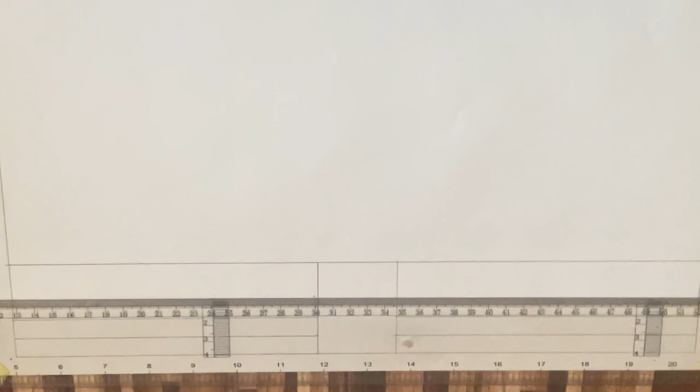Now in continuation with the title block, you can now put all your lines that you are going to be writing your names, your scale and everything on. So see this, this, you're going to make sure it's set with the ruler, with the board, and also with the paper.

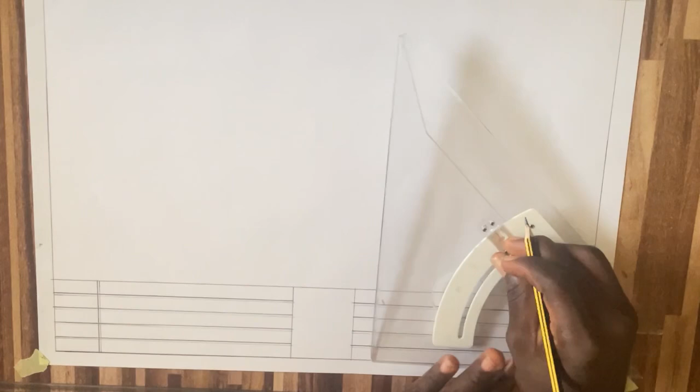And then you can bring your adjustable set square, draw a line here, do a small line that will not be as thick as the first one, just to make it look more aesthetic, and very beautiful. Same thing goes for this place. The first line thick, and the second one will look thin, not as thick as the first one.

Then you can start your drawings. Firstly, draw the straight line. Okay. Draw another straight line here. Take your adjustable set square, draw a straight line.

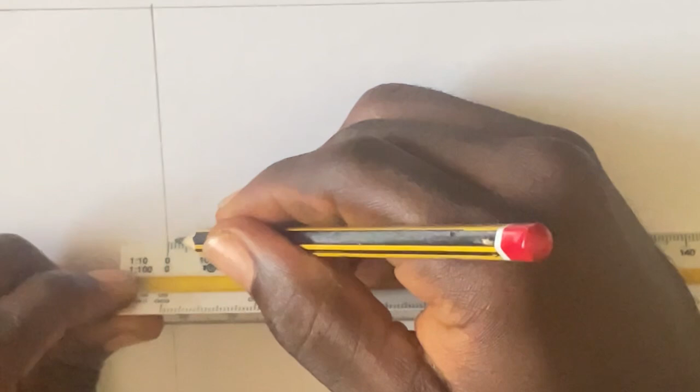We are using a scale of 1:100. Scale of 1:100, meaning 1 unit on this paper means 100 units on the ground. So this is the scale, and now place your scale rule on the lines you have marked. When you place it on the line you have marked, you count. This is 1 and this is 2. At the center of 2 and 3, you mark it, and that is the 225. We call it 225 because it's the standard measurement of the block.

So once you've marked it, you can take your adjustable set square and then draw a straight line, a thin line. It should be a thin line, but because I want you to see it clearly, that is the reason why I'm making it thick now. So once you've drawn the line, you can take your scale rule and mark these edges again. Take out another 225. 1, 2, and 225 here, the center of 2 and 3. Once you mark it, you can take your T-square, set it to where you've marked, and then draw your straight line.

Now I said we are doing a 2-bedroom flat, right? So first of all, we are going to measure the bedroom. In measuring the bedroom, you're going to place your ruler in the scale of 1:100. I'm going to mark out 3.6, that is 3,600. I'm going to mark it out. When you've marked it out, then you can mark your 225 beneath the 3.6 you marked earlier, and then you can take your ruler and draw a straight line.

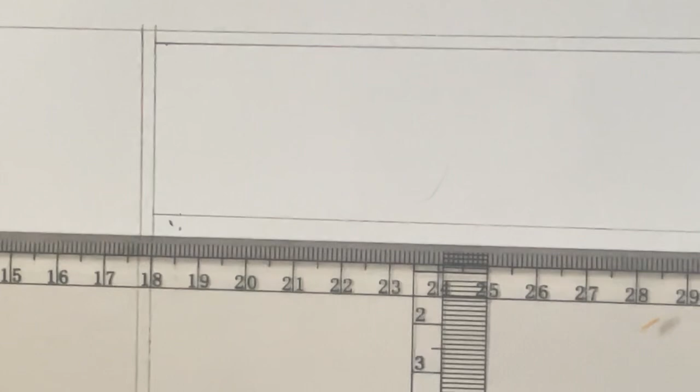Once you have marked your 3.6 and your 225, you can mark your toilet below. The standard measurement for the toilet around this place is about 1.5. 1.5 is okay on the scale of 1:100, and then mark your 225 below it. Then you will draw your line again. Then beneath the toilet, you are marking another 225 for the second toilet. 1.5 and 225 again. Then mark your line. Make sure that your line is straight.

And then you can now mark your 3.6 for another bedroom, the second bedroom that will utilize this toilet over here. Make sure you set your scale rule with your markings, and draw a straight line again.

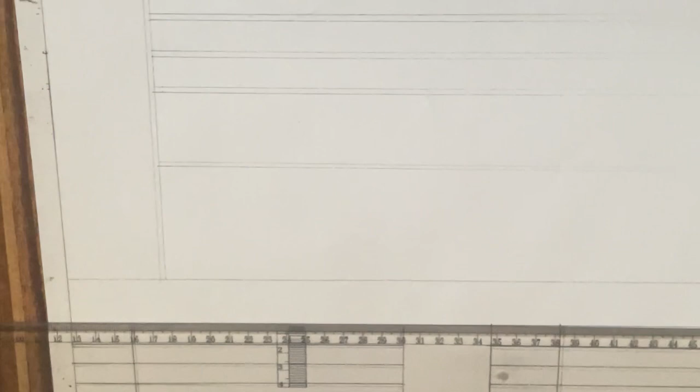Now you can take your scale and give it another 3.6 up here. That means the length and the breadth is 3.6 for the building. Then you mark your 225 again. Take your adjustable set square. Your adjustable set square is for the vertical lines, while your T-square is for the horizontal lines. So you mark it and you mark your 225. Make sure you get down here because you are going to be needing it on this side too.

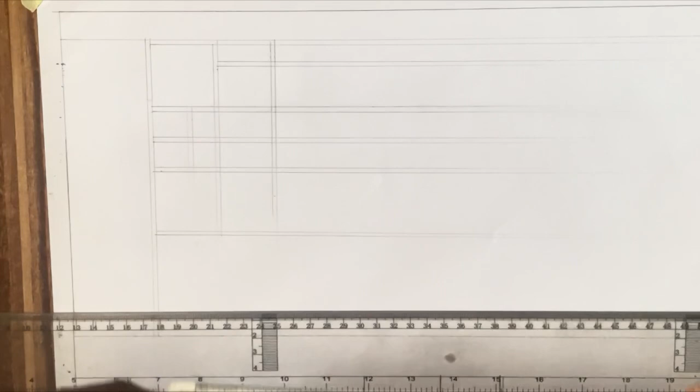And then you can take your ruler and mark in 2 meters here. 2 meters, and mark your 225. And then the toilet will now be done. Now place your ruler to make sure that you mark the kitchen. The kitchen, you can give it about 2.7 meters, and this is 2.7 meters. This is 2.5, this 2.6, and this is 2.7. So you mark your 225 that represents the block.

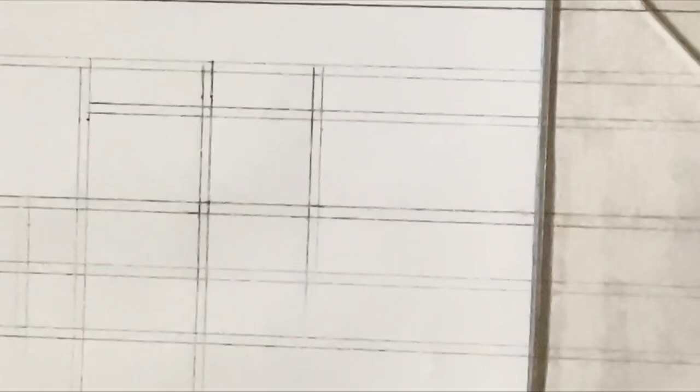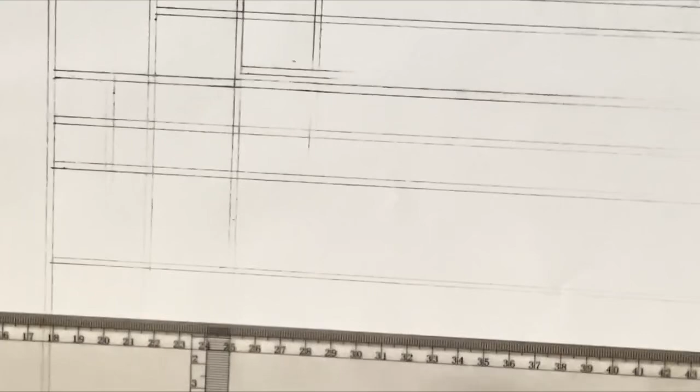And now you can place your adjustable set square and mark it out. Once you have marked your kitchen with the 2.7, you can now make the length 3 meters. Mark the length 3 meters in here too. Mark it. Use your ruler. Do it 3 meters like this. Then mark your store. Give your store at least 1.2 meters. 1.2 meters. That's all. Mark it.

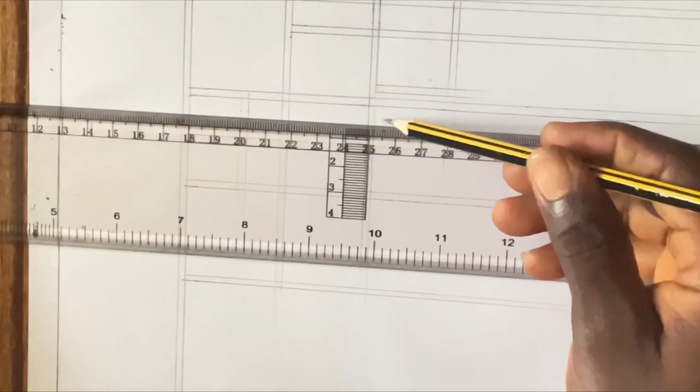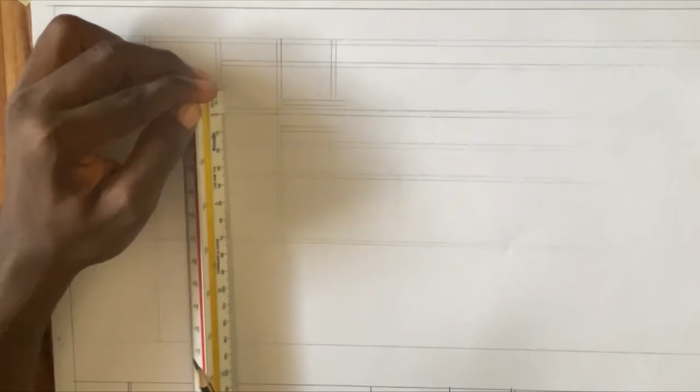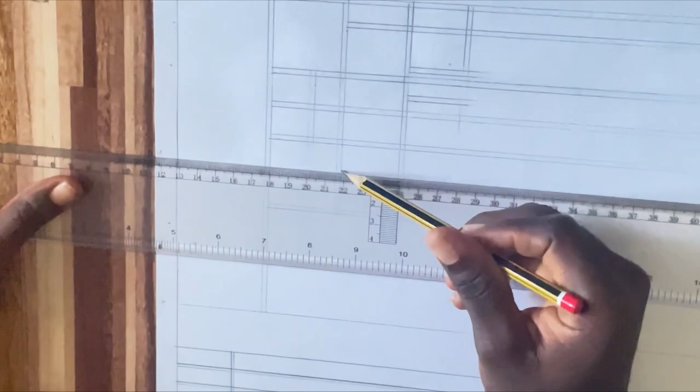Now, since you're done with that, you can check. Once you've checked, you can place your ruler here beneath the dining and check the measurement of your living room. It should be at least 5 meters, and place your 225 here and check for the breadth, and that should be 3.1 meters. It's okay, you can do any sizes you want. Place your T-square and mark it out. Make sure your T-square is straight.

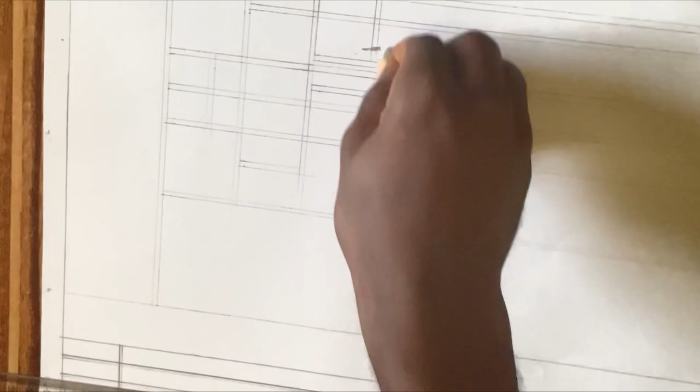Once you're done with that, you can take your cleaner and clean the lines that are not supposed to be there, or that make it look unreal. As you can see now, we have already cleaned all the lines that are not necessary. It is starting to look like a plan now, but there are still some features we have to bring out. Now we can start bringing out the windows.

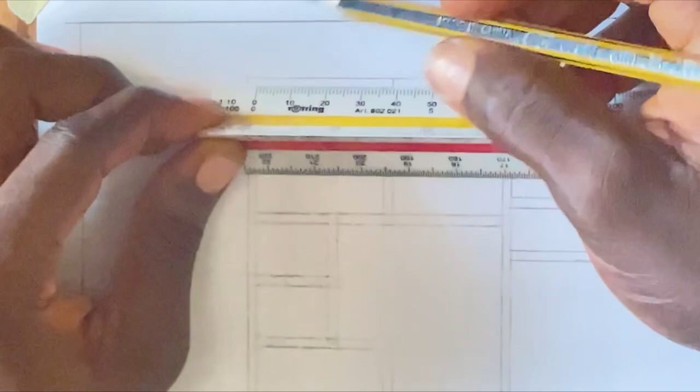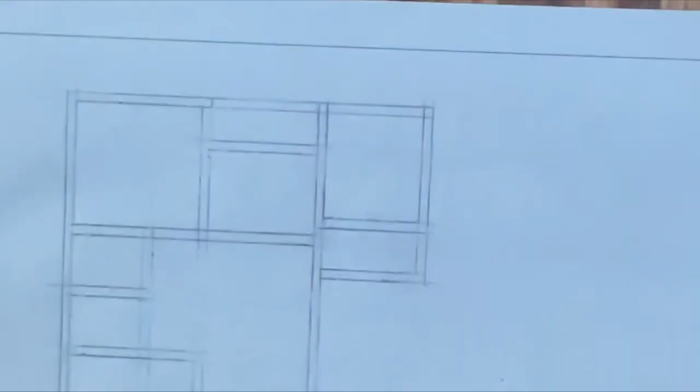Now this is 3.6, as we have marked. The breadth is 3.6. Now you want to bring out a window. Your window should not be more than 1.2, and 3.6 divided by 3 will give you 1.2. So when you mark 1.2 here, and also mark another 1.2, you have showcased your window, and it falls in the center. This is 1.2, and this place is also 1.2. So it falls to center like that. You can now place your adjustable set square and mark it up here, and also mark it down here, because the same window works for both bedrooms, since they are situated along the same side.

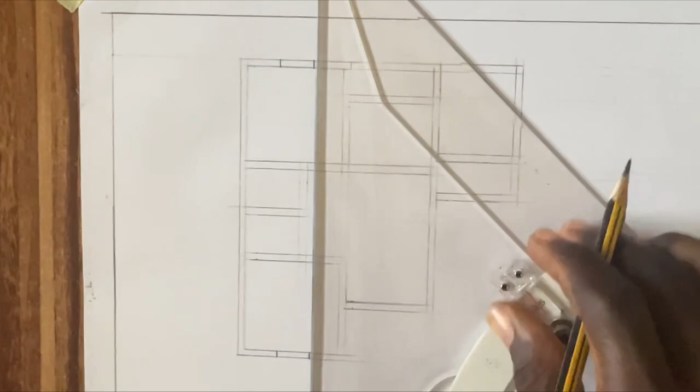You can bring out a window for these toilets, and their window should not be more than 600. So you mark it down here, place your ruler here too, and mark 600 here too. Place your T-square, marking those horizontal lines like this.

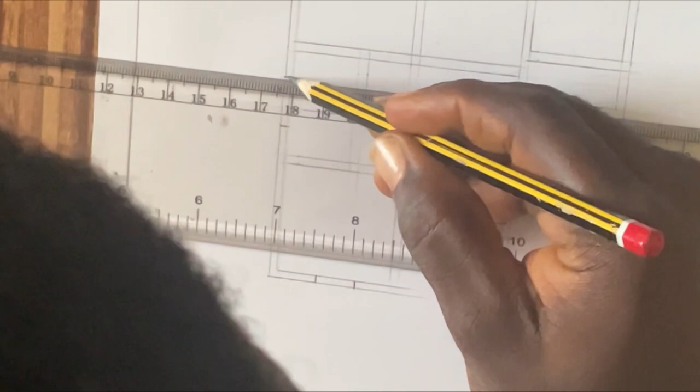Now you can also indicate the window for the dining. This dining is 3 meters. I want to bring out a window of about 1.2 also. So divide the 3 meters into 2. It will give you 1.5, right? Mark that center of 1.5, meaning this place is 1.5 and this place is 1.5. Then mark 600 to this side, place your scale rule to the center again and mark 600 to this side. 600 plus 600 will give you 1.2. Then mark your window out here too. That's good.

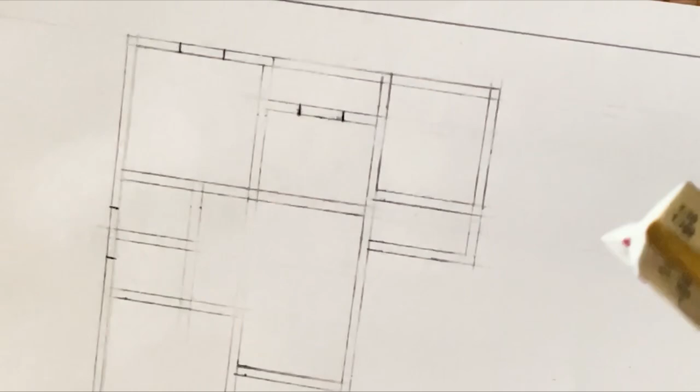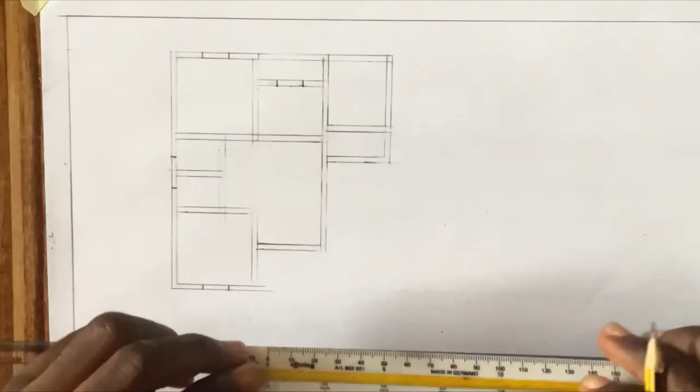For the kitchen now, the window should not be more than 1.2. This is 2.7, and you want to mark a window of about 1.2 that falls to the center. Divide 2.7 by 2, and it will give you 1.35. Locate 1.35 here. Mark the center. Then mark your 600 here as you marked the former one. Mark your 600 here too. Good. Then take your adjustable set square and mark the lines out. Good.

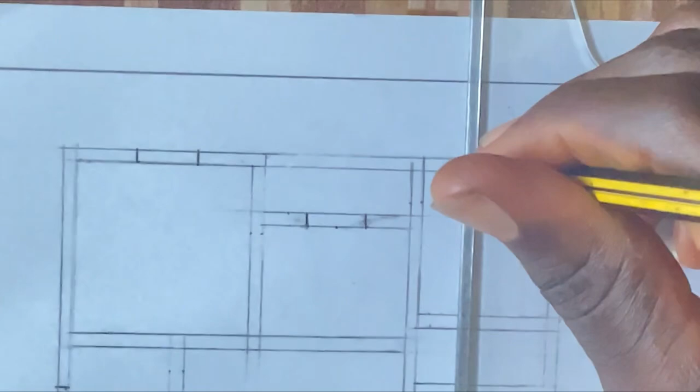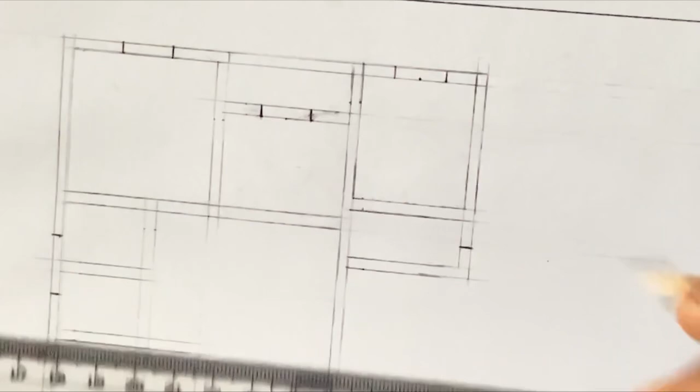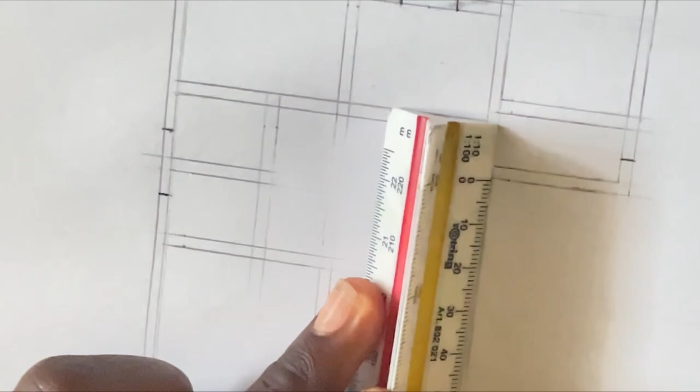Then you can come back to the store here, and the store window should also not be more than 600. Give it 600, and mark it out like this. Now coming to the living room, as you can see, from the store to this place is nothing less than 4 meters. So you can easily locate the center to be 2. Since it is 2, you can mark your 600 to this side and also 600 to this side, and mark out your windows.

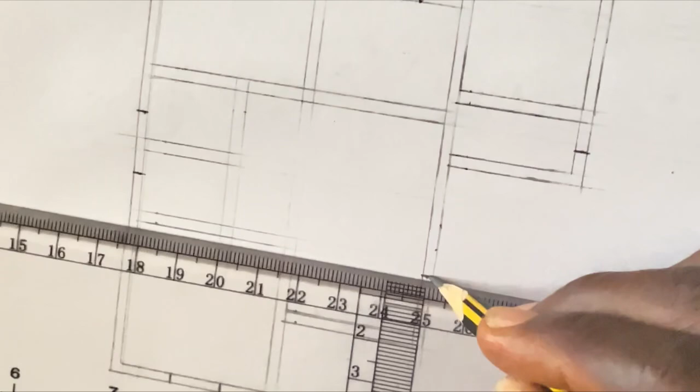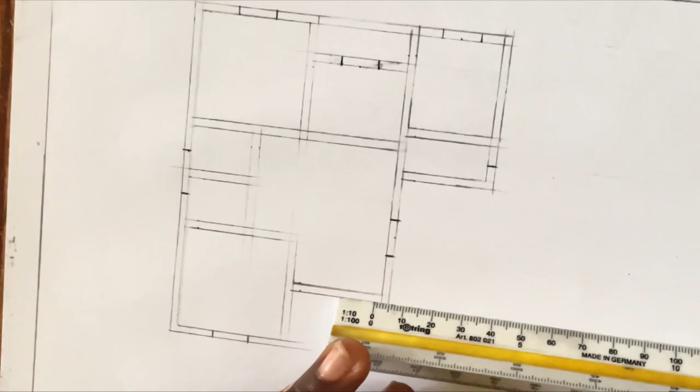And then coming down to this place, it is a living room. It should have at least 2 windows. So you can showcase another window here. Once you've given this space about 2 meters, you can easily show your 1.2 window. Now take your adjustable set square and mark it out.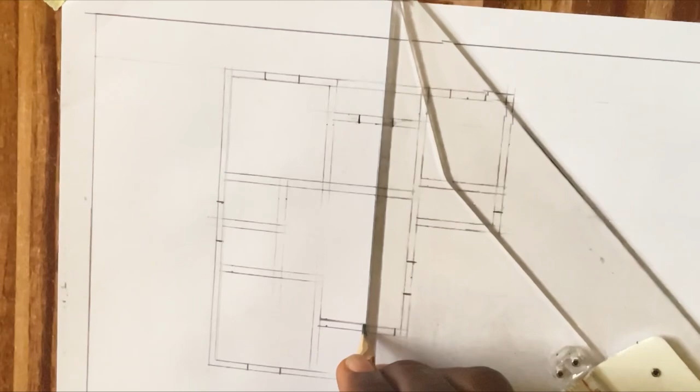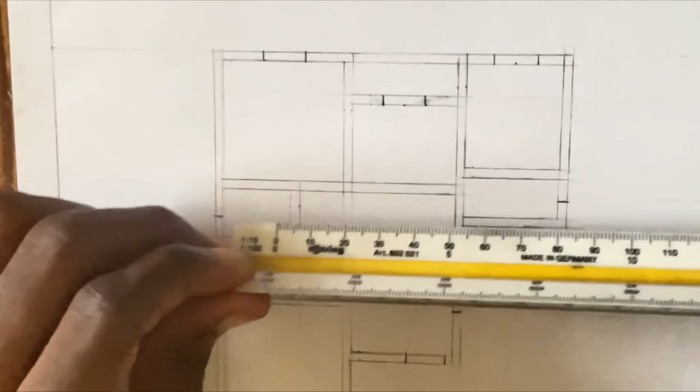Adjust this place. Now, since you have marked out all the windows, you can now start marking out the what? The doors. You can now start marking out the doors. Coming down to this place, you can give it no less than 900. The door should be 900 for the bedroom. This place too is 900, though both of them will correspond with each other. So when you mark this out, you can mark this out.

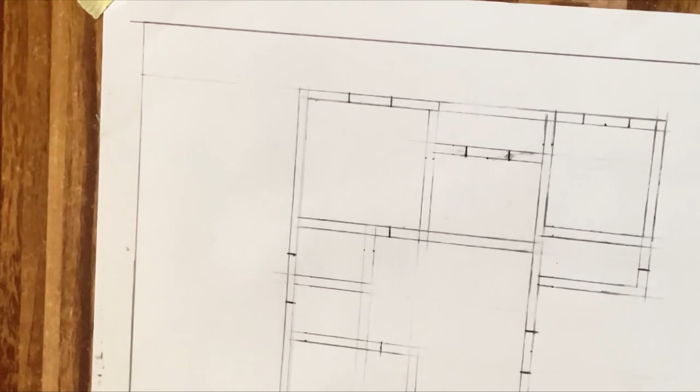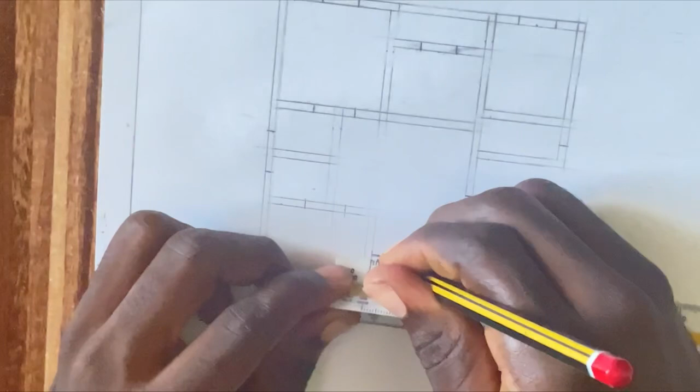Now you can also make your doors for the toilet to not be more than 750. Yeah, take the adjustable set square, show the lines of your doors, mark out your door for the living room. First of all, make your door for the living room to be 1.2, because it has to be wide. It is the main entrance of the building, so it has to be wide. So you can showcase it like this, and something like this. It's okay.

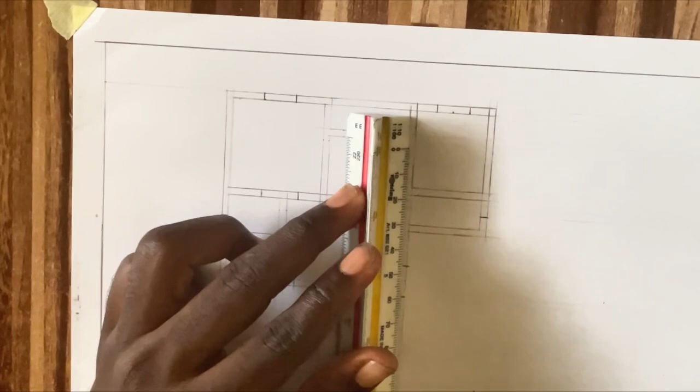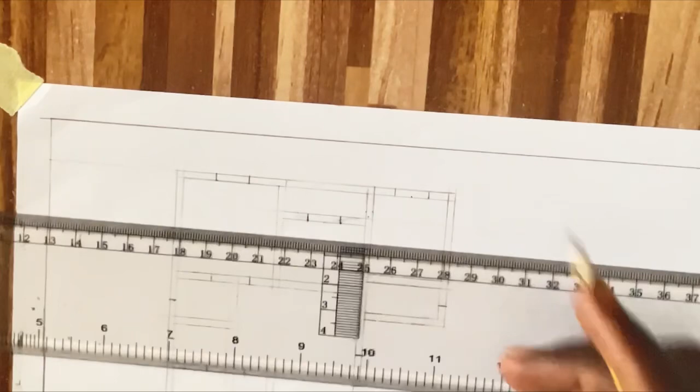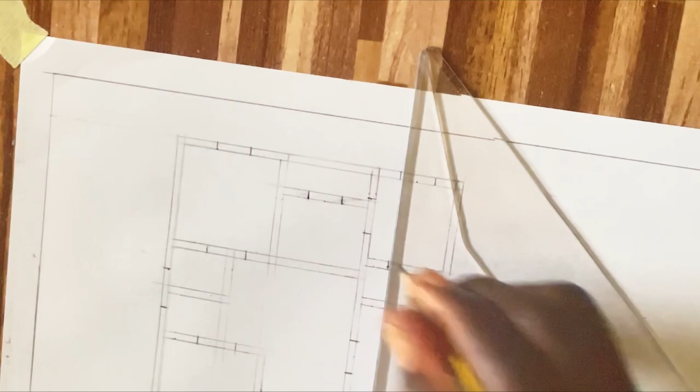And then you can mark your doors of dining room to the kitchen to be also 900. Mark it 900 like this. Also mark the exit, the kitchen exit, and give it 900. This is it. Yeah. And your doors for the store, it is the kitchen that you pass through to enter the store. You can give it a 750. Mark it. Now you're done with the doors.

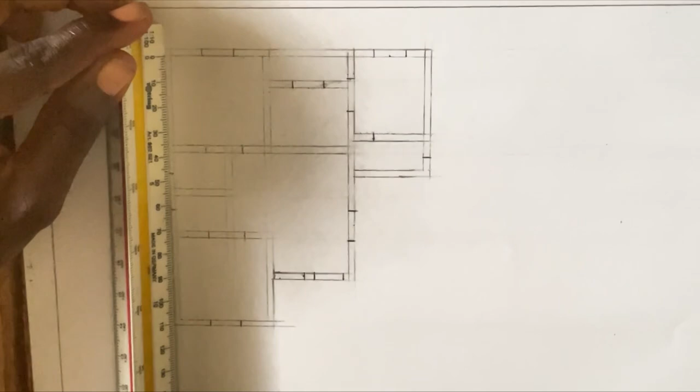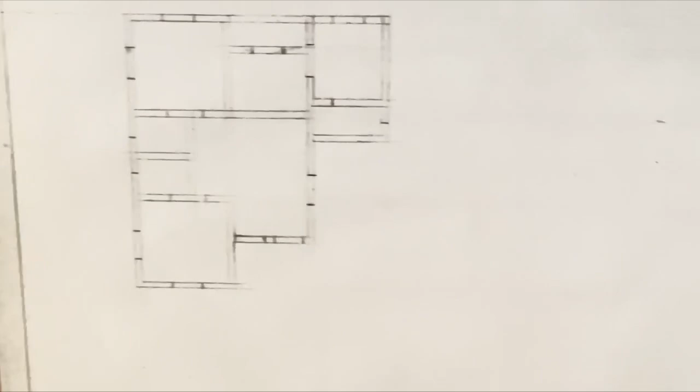Now look at your bedrooms. You see that there is window here, there is window here, but the bedrooms need ventilation. There should be enough ventilation coming into the bedroom. So you can now come down to this place and mark another 1.2 here, 1.2, mark another 1.2 here, another 1.2 here, and another 1.2 here, and then mark it out as what? As a window. Yeah. Now your window is complete. Now you can start taking it out to make sure that it is taken out very well. You got your windows.

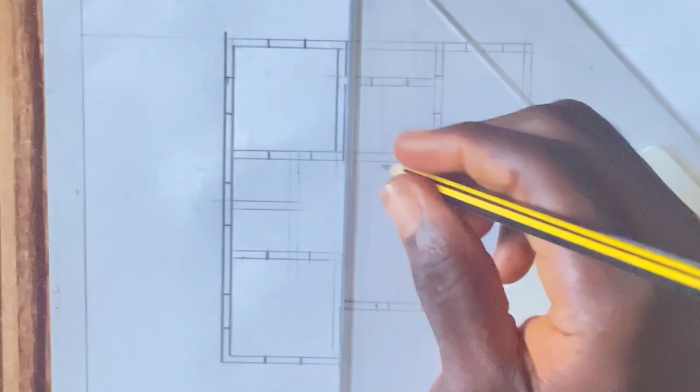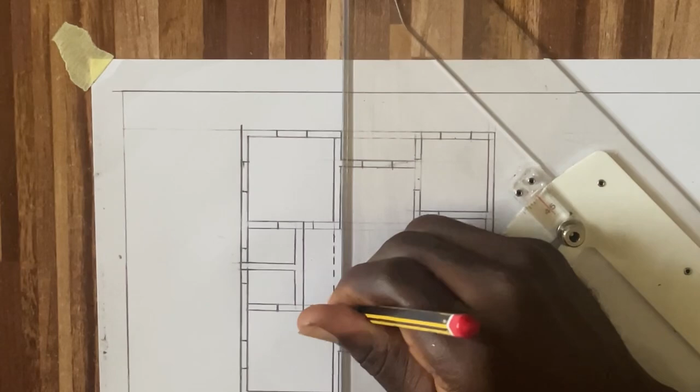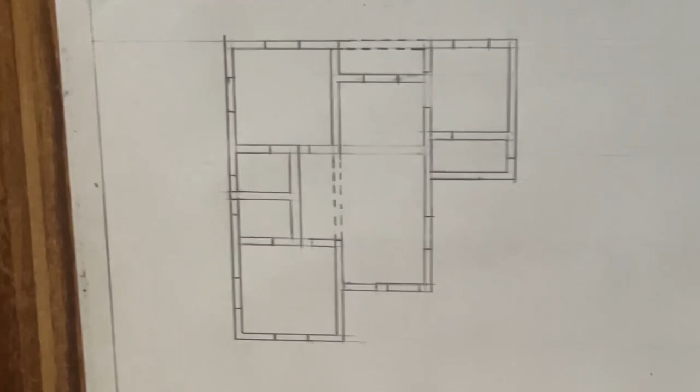Now, since you have marked it out, you can now indicate your arch. Arch is shown by a broken line. Okay. This side, there will be an arch showcasing that there is no door there, but an arch. Likewise, this exit, you can showcase an arch here too, showcasing that it will not be a door, it's just an exit outside of the building. And also to the dining area, you can show the arch too. This, something like this. It's okay.

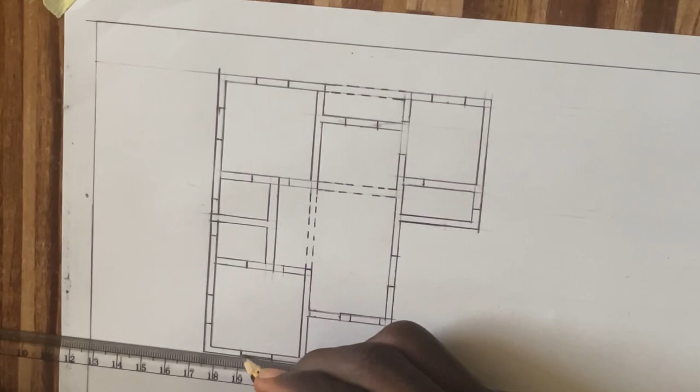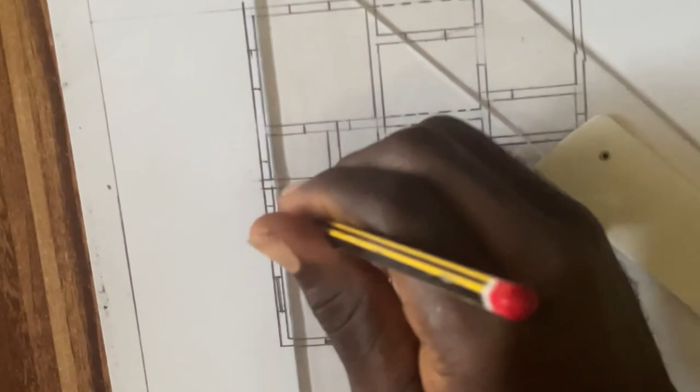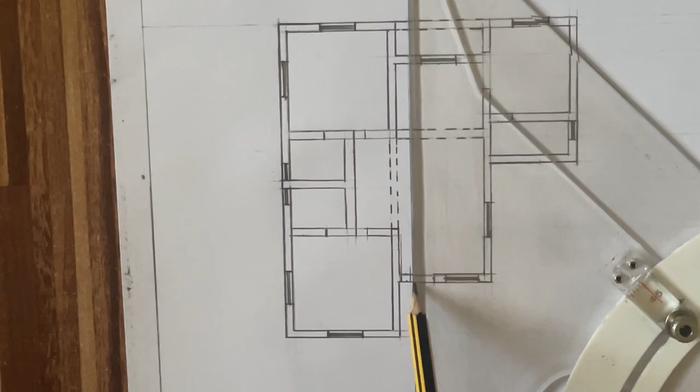Then now you can start hatching your windows. You can hatch it in any form you like. Just make sure that it showcases that yes, it is a window that is there. Like that. You can hatch it like this. Hatch it like this. Now we are done hatching the windows. You can now start hatching your doors. Remember, if you want to do yours, make it neat and very good. This is your rough work, so you can make yours very neat.

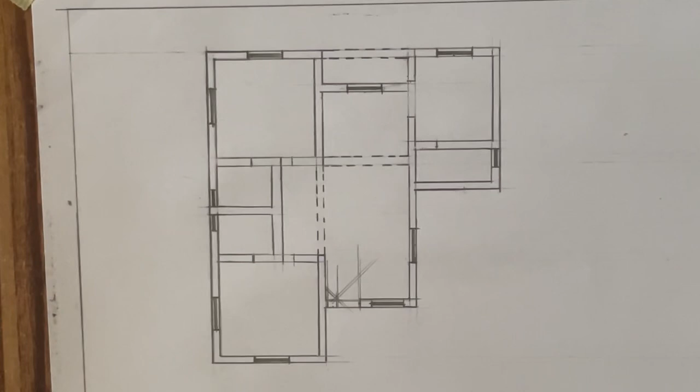Arc your door like this, showcasing that this door is a door that is wide, the main entrance of the building. You can arc your own doors in different ways. So there's a door here. Yes, you can arc this door.

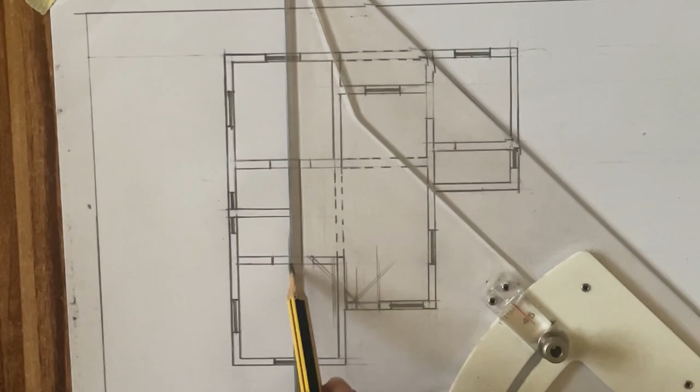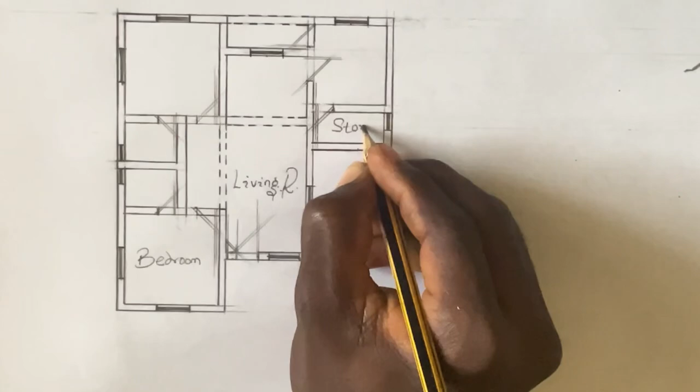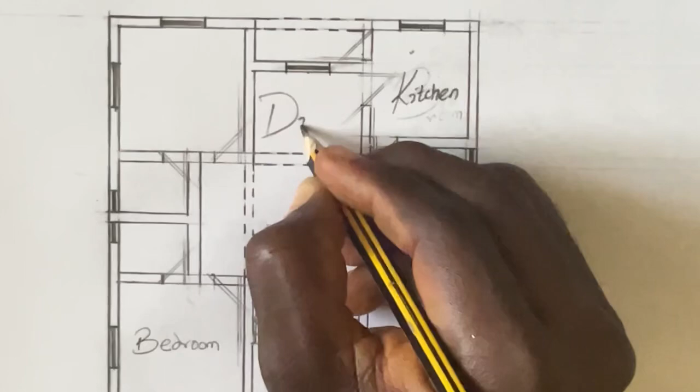Now, once you're done arcing the doors, door here, door here, door here, you're going to start with indication of writing of the rooms. This is bedroom. This is living room. This is a store. This is a bedroom. Sorry, this is kitchen. Kitchen. This is dining. And this is also bedroom. This is an exit. This area is lobby. This is toilet. This is also toilet.

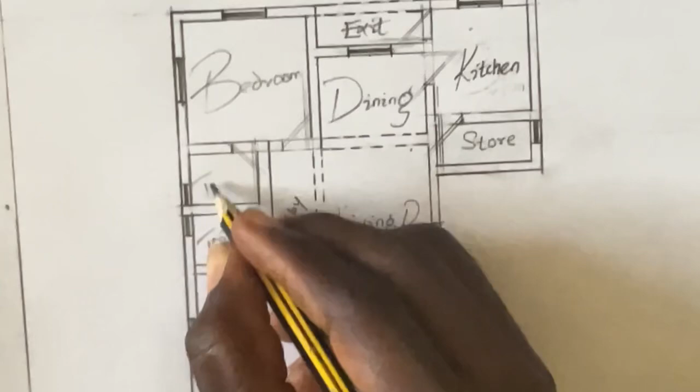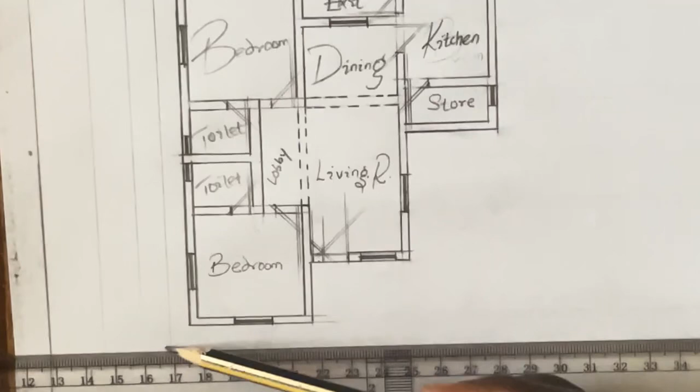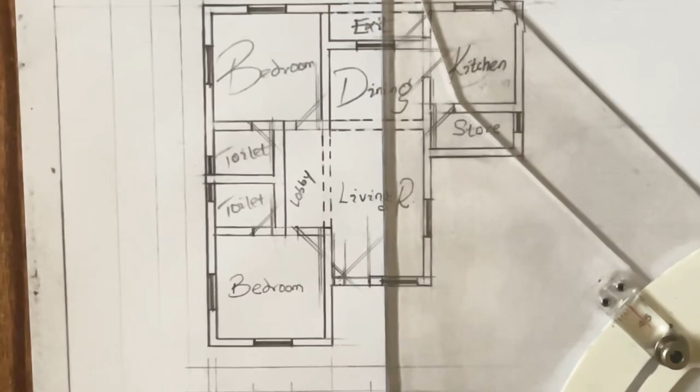Once you're done with the writing of the names, you can now show your dimension line. Show your dimension line here. You can show your dimension lines here. Now, show like this. Show your dimension lines. Show a dimension line here too.

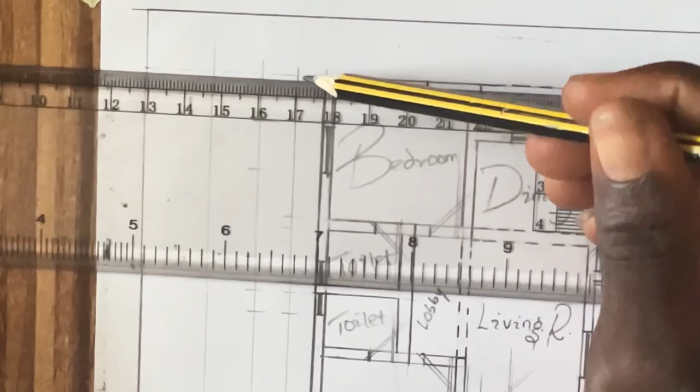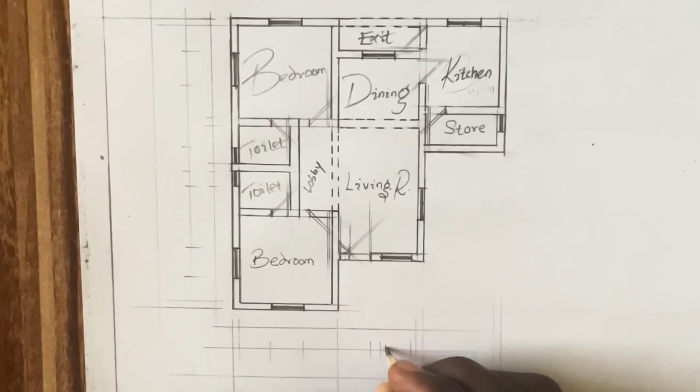Now, you change the dimension line. You can also decide to show it this side too, this side, this side, and this side. But I would only want to show it on these two sides, this side and this side. So, this side too. It's okay. Then you can start writing your measurement. This is size of window, so this is 1.2 meter. This is also window, 1.2 meter. This is 225, the size of the block. This is also 225.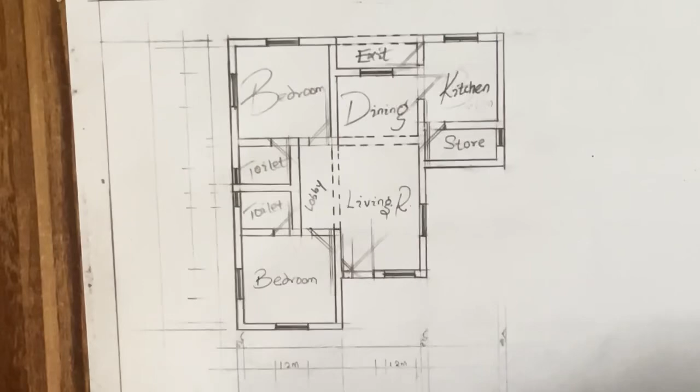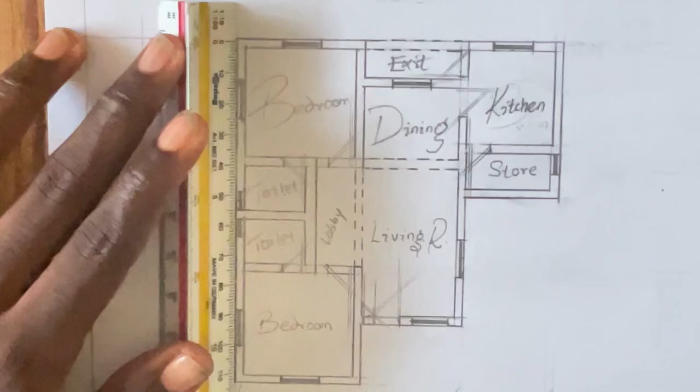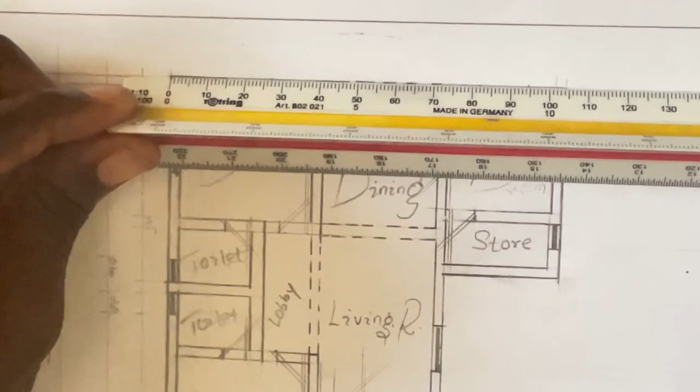Measure this place with your ruler under the scale of 1:100. It gives what? It gives 4. That's 4 meter. Now you give out the overall dimension of the building, the size it will take. That's 110.4 on this side. 110.4 what? Meter. And also the size of this place should be measured like this. And that is 100.4. 100.4 meters.

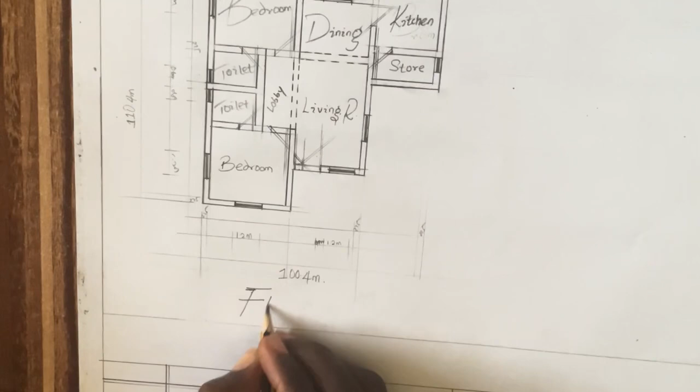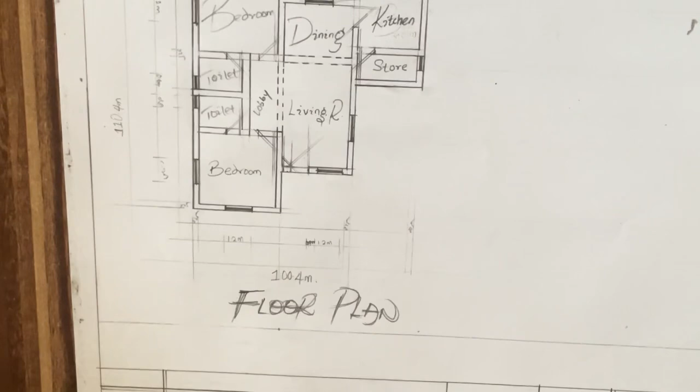Now this is it, and you can showcase your indication that this is what? Floor plan. I'm going to take it out. And now, as you have seen, we are done with the floor plan.